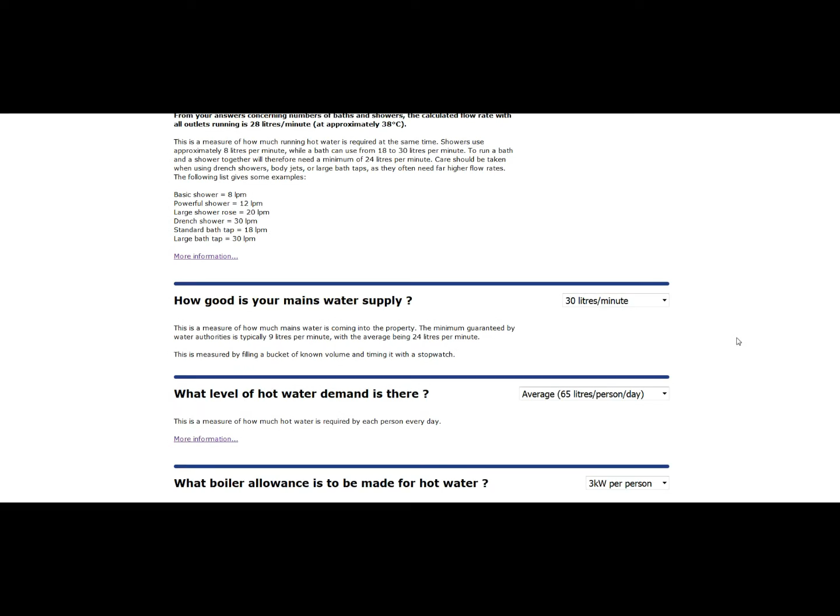How good is our mains water supply? Well, this is to draw your attention to a question that often gets overlooked. I'm going to set that to 30. I'm going to say for now I've got a mains water supply that's good enough for what I'm asking. What level of demand is there? Well, average 65 litres of water per day. 3 kilowatts per person is fairly typical for a hot water allowance.

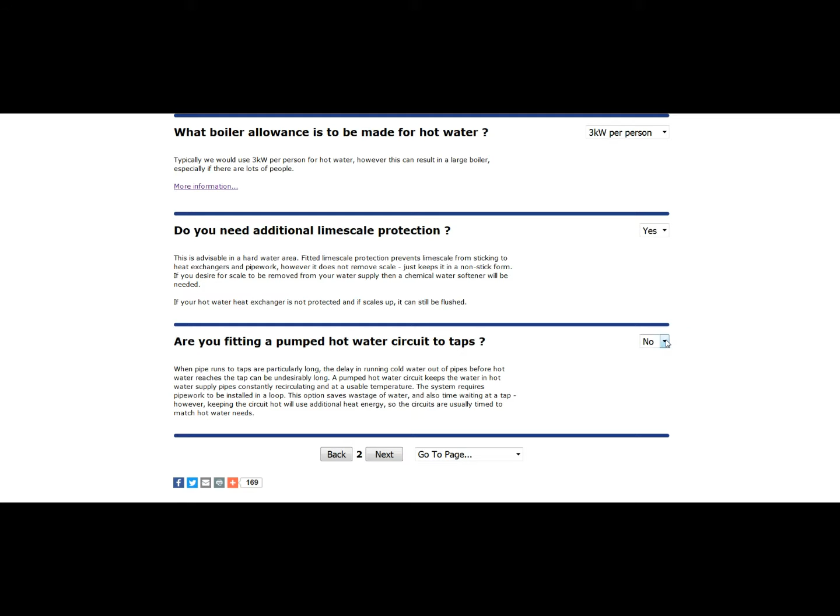Do you need additional limescale protection? Well, yes, we're in a hard water area. And do we want to fit a pumped hot water circuit? So that's a secondary return to make sure that the water is hot at the taps. Let's go yes. Next.

Is the system to provide central heating? Yes. Okay, now in order to do any calculations it needs to actually work out a rough heat loss. So it's a few questions here. Area of the ground floor, well, let's say it's 100 square meters. Let's say I got 25 meters of external wall. Well, that's a bit generous. Let's say 12 meters. Room height 2.4 meters. It's 2 stories.

Yes, it's got some insulation. It's not extremely well insulated by any means. Heating degree days. This is a question about where you are in the country, how much heating requirement there is based on geography. So we'll leave it at the standard. Some questions you can't answer. They're in the advanced mode, which we're not covering today. Are we using heat recovery ventilation? No. How many square meters is heated by radiators?

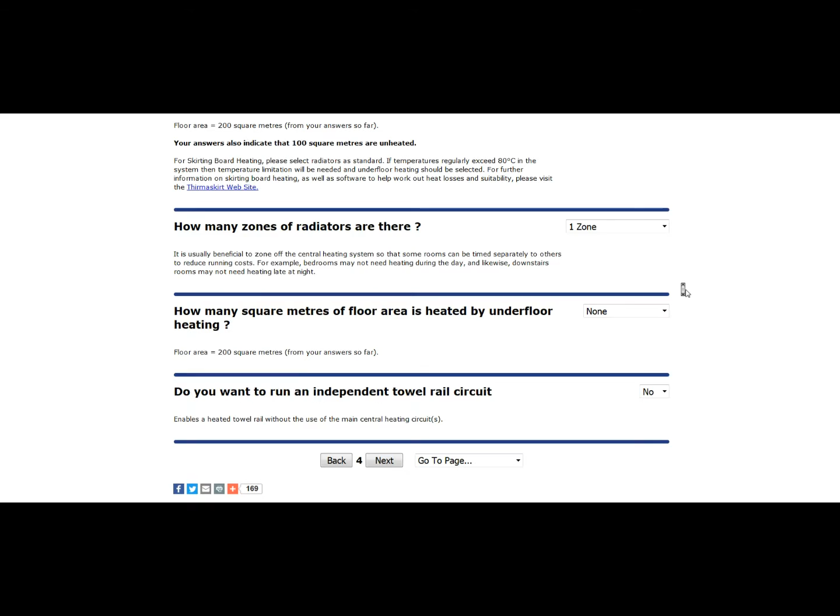Okay, so I've got 200 square meters space to heat. I'm going to go for a split of underfloor heating downstairs and radiators upstairs. So we've got 100 square meters on radiators in one zone, which is upstairs. How many square meters by underfloor? Let's go 100 square meters. As you notice, the questions are resetting each time I answer a question. That's to make sure that the other questions appear as they need to.

How is the underfloor heating controlled? Temperature control is on the manifold, which is fairly typical. And do I want to run an independent towel rail circuit? Let's get that out of the way. Let's see, that is no. Are we going to use a boiler? Yes.

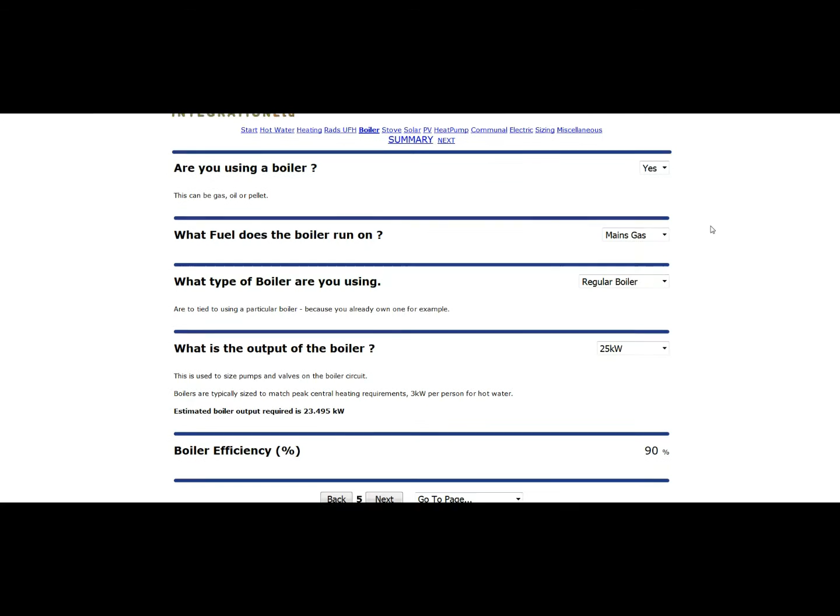Okay, so it's mains gas. It's a regular boiler. We could, if we had a boiler we want to reuse, specify a system or a combination boiler, but given we're on a wood burner system here, we're probably on a vented system, so a regular boiler's fine. What is the output of the boiler? Well, it's done a calculation for us that we need 23.4 kilowatts, and it's picked the next boiler up, so we'll go with that as we haven't got a boiler in hand as yet.

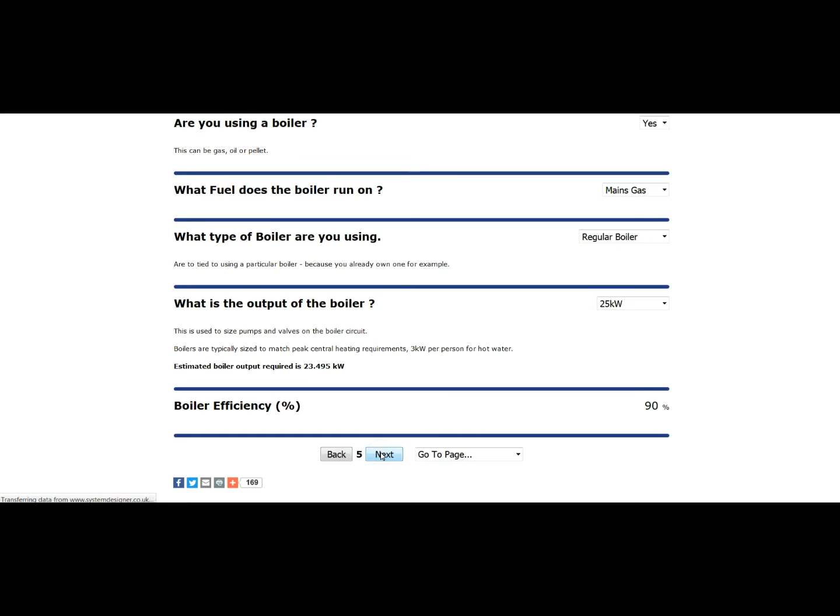Now we're going to go for a wood burner. We're actually going to go for wood burner and solar panels. Now the wood burner needs to be, no, it's not actually directly below it in our house. We're going to say it's below and across, so it's as if it's downstairs and on the other side of the house, so it's probably going to need to be pump assisted. But the system will pick up on this and select the right part of the equipment.

The output of the stove is again to work out whether it will gravitate or not. So we have 10 kilowatts to water, 5 kilowatts to the room. Let's say it's more like 6 kilowatts to the room and 8 kilowatts to water. And it'll be a manually adjusted one. The other option is self-regulating.

Fuel cost does do a calculation of running costs. That's where that figure is required for. Now, how often are we going to use it? On a running costs calculation, we need to know really if you're going to use it once a week or all day long. So there's a question here to get a feel. So let's say we're up to 6 hours a day. We're going to be serious about using the wood burner.

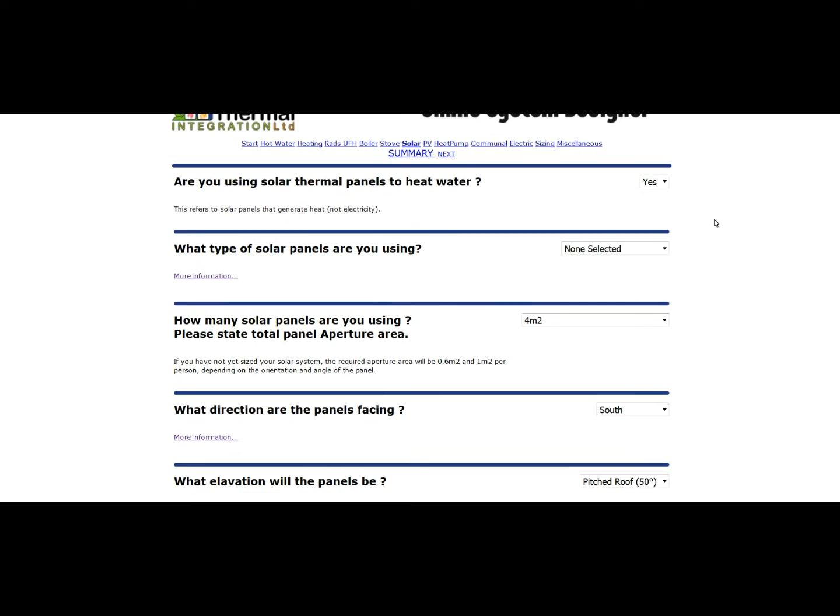Solar panels, yes. We're going to use flat plate. Let's go for 4 square meters. Let's say we're on a south-east facing roof, pitched roof, 50 degrees. Now we're down in this part of the world, so 1100 kilowatt hours per year off the solar is a good starting point. Overshading factor 1, so that means we haven't got trees covering the solar panels.

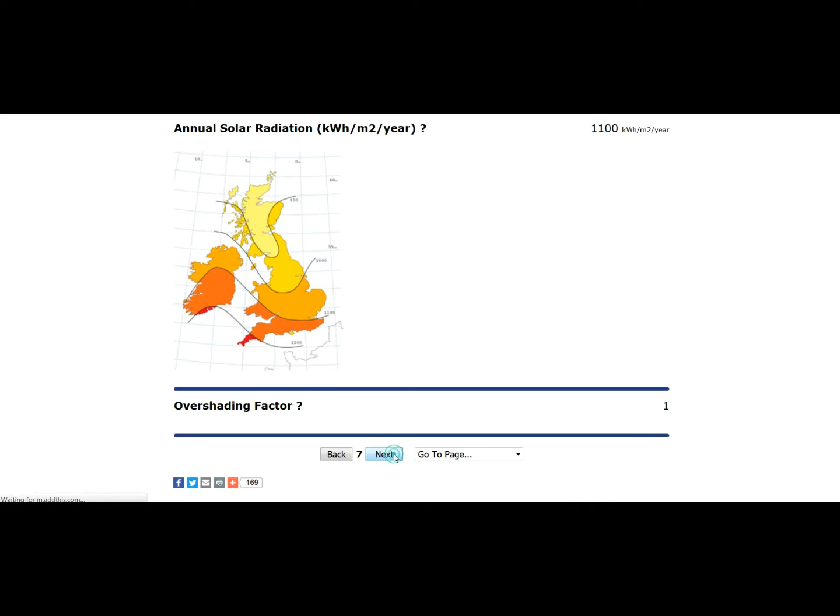Are we going to use PV electric? No. Are we going to use a heat pump? No. Are we going to use a central communal heating system? No. Do we want to run central heating on electric alone? So this is a backup, so if everything else fails, do we want to be capable of running everything electrically? Well, no, we've got solar panels, we've got a wood burner, we've got a boiler. I think we'll have got enough, but we will have a 3 kilowatt electric backup just in case.

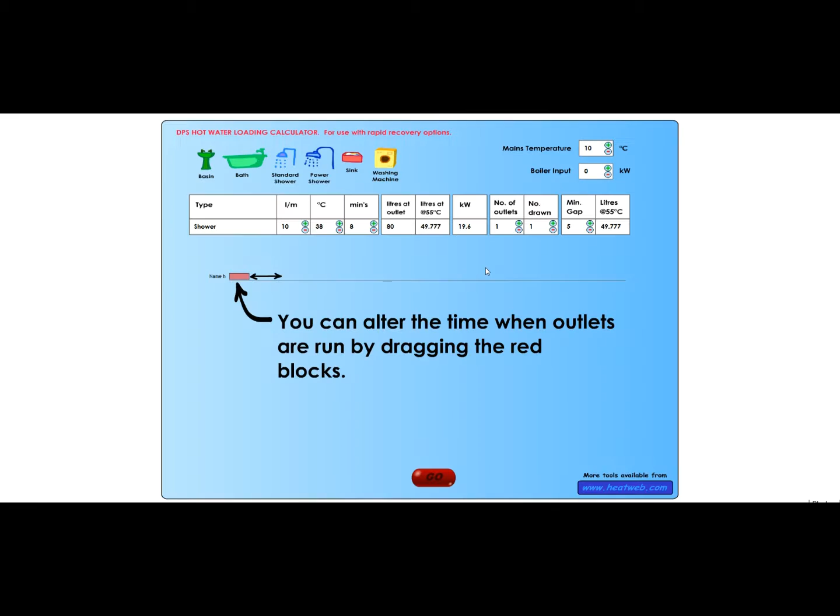Are there any size restrictions? Well, no for now. 300 litres. It doesn't pick the store size, but it does put some calculators there, and it also gives you a recommendation required for the solar. Now this button here, water load calculator, will drop in the 3 people in the house, 2 showers and a bath, 3 draw-offs, 25 kilowatt boiler. I can move the outlets around if I want, to time things specifically.

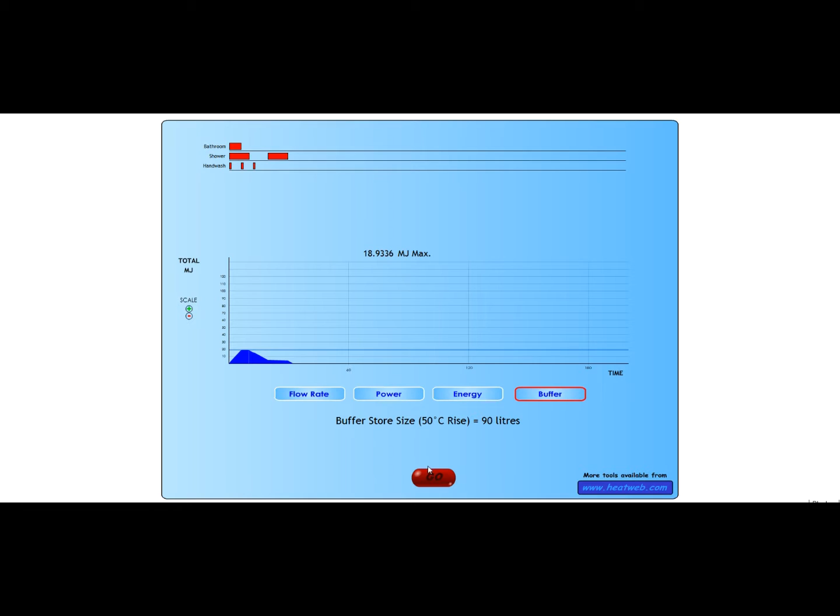So let's say go. Now this is giving us a recommended buffer size of 90 litres for hot water, or a minimum, because we have the boiler to assist us. We could say, well, if we have no boiler input, so if we want to do all off stored heat, put the boiler down to 0, go to 0, and we're on 230 litres. So we're between 90 and 230 litres for domestic hot water.

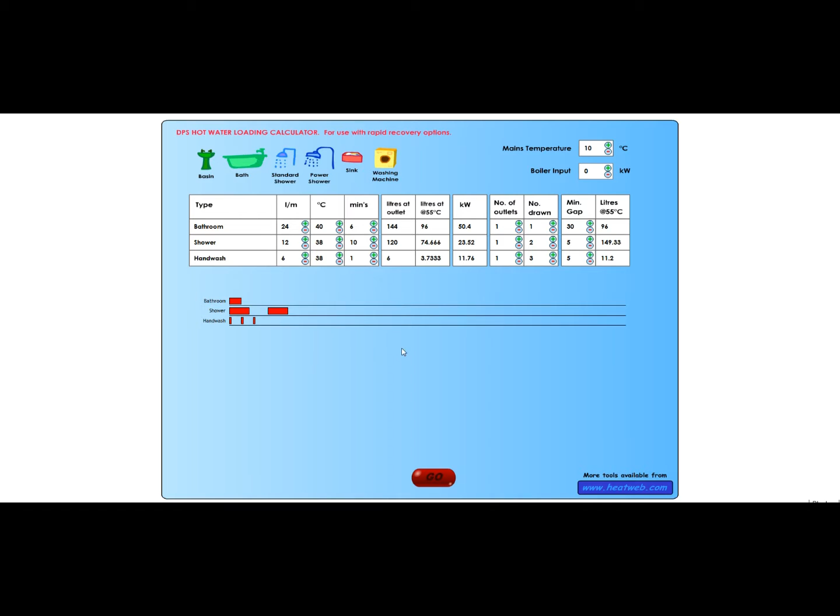Okay, now then there's also a calculator for central heating. So imagine we wanted to run central heating for an hour in the morning off stored heat, before say we get up and reload the wood burner. We don't want the boiler to kick in. Say we're going to run just 1 radiator. So let's put that down to say a 3 kilowatt radiator in the bedroom, just to get the bedrooms warmed up for an hour, just to make it nice enough to get out of bed and chuck some wood on the wood burner.

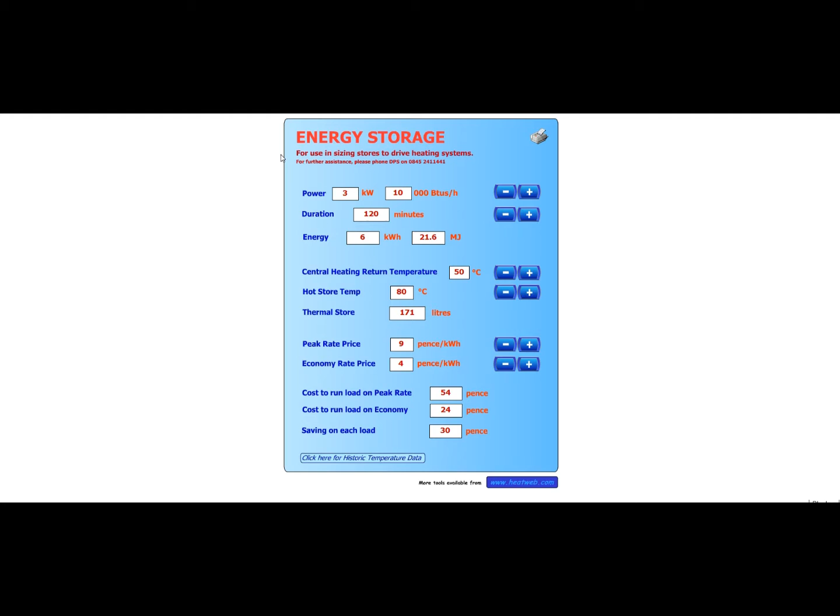Now radiator temperature, the store is at 75 degrees. In fact, the wood burner, so let's put it up to 80, and the central heating return will be about 50 degrees coming back from the radiators at a minimum. Now this tells us we're going to need 85 litres of storage. If I put it for 2 hours, I'll need 170. So it's 170 litres of storage for this radiator in the morning, and I needed between 90 and 230 for hot water. So let's stick with a 300 litre store.

Is it possible to install a feed and expansion tank? Well, yes. Now the system will do full RHI and payback calculations, so it asks you questions such as the payback periods, the various tariffs, labour costs, capital costs. Now we're not going to put numbers in at this stage. We're just going to skip through this section to the summary. So we've answered all the questions now. Now we're going to give it a project name. This is a test.

No need to answer in case anyone in sales picks up my inquiry. Now we have all the questions here in summary format. We can change any one in particular, but we're quite happy with all that.

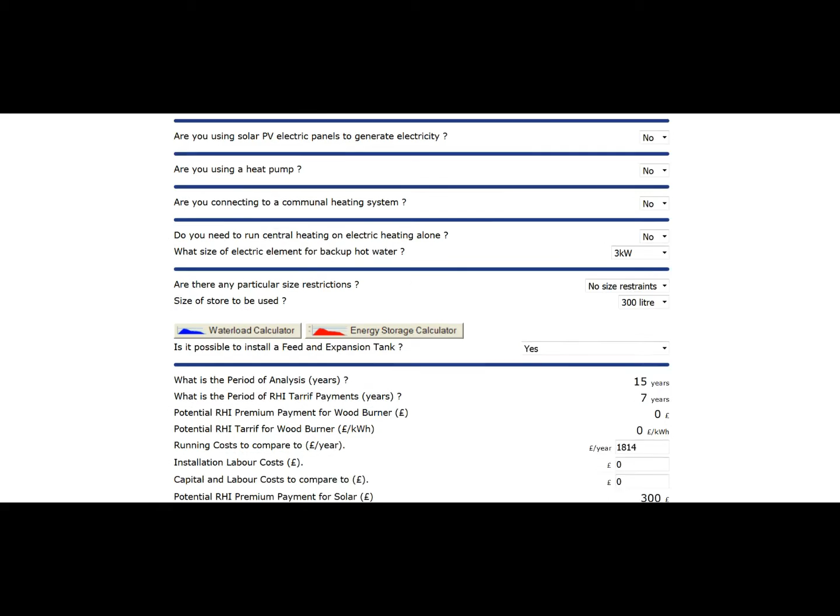Next, now it will ask me for some details. Let's just put in test, what I did earlier, test subject. No, I won't put it under my email. I put it under a new one without a password. So let's call it testingttt@heatweb.com. County Suffolk. Postcode, I shall put it near the factory. We do need to just put the first part of the postcode.

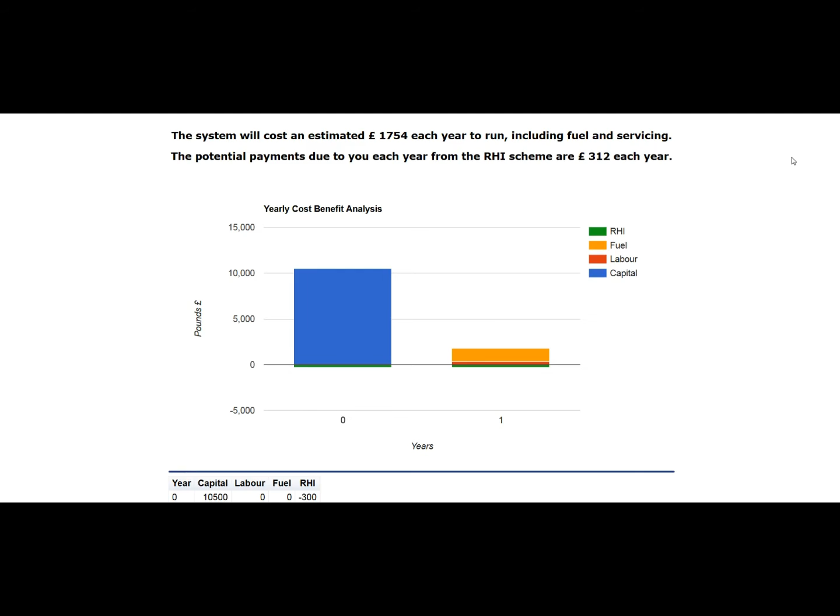Now I won't put a password on this, which does mean it's open to public perusal. There are a few other questions to answer, and if you're an installer, please put some details down there so that we can price accordingly. Okay, now that has sent an email to our main sales agent in that area, and it's also come up with, now we didn't put proper figures in, so ignore the figures, but to give you a feel, it's given us a costing, capital, labour, running costs, and it does payback calculation tables.

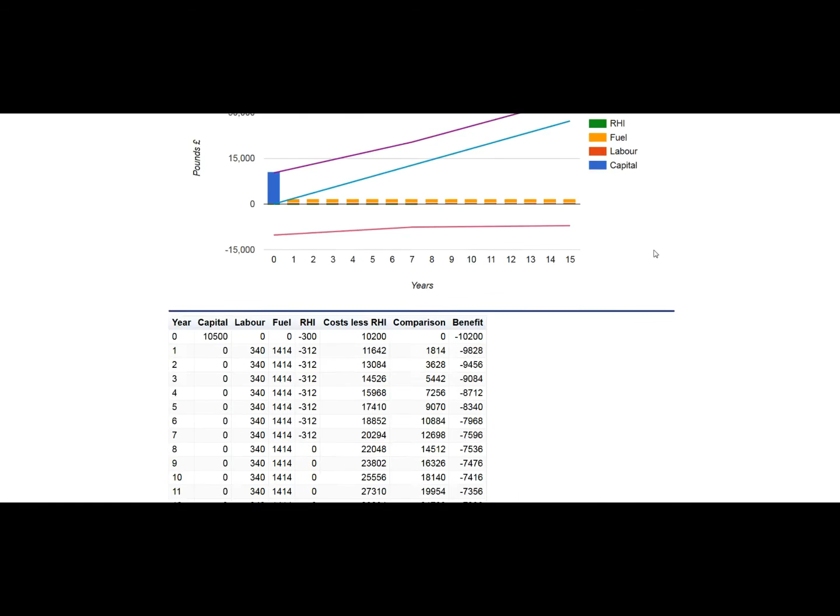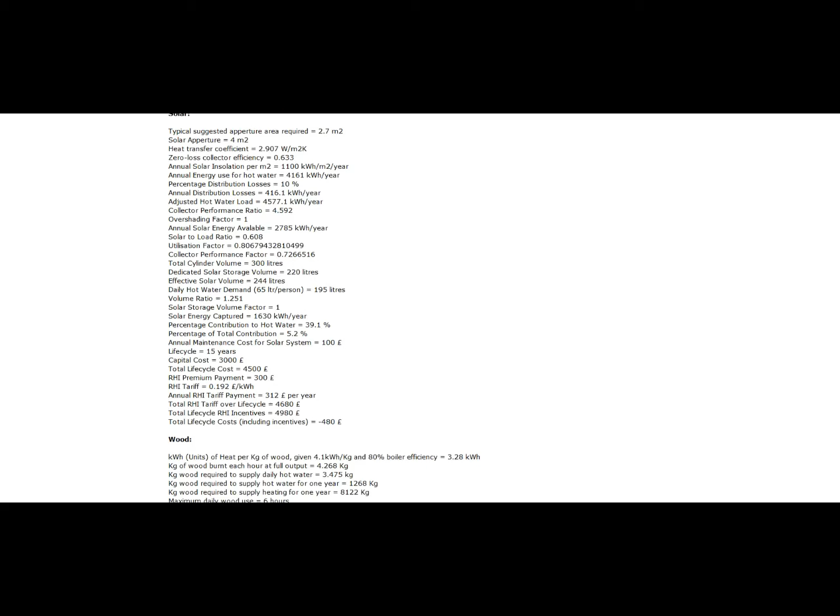Skip past this. The main interesting bit here is the calculations section. So it's all the calculations to do with hot water, the kilowatts, the total energy use per year. It does the same calculation for central heating. So we've got all of our heat inputs as well. These are made up of solar, where we do a full SAP calculation on the solar. We have wood burner calculations, and we have gas boiler calculations.

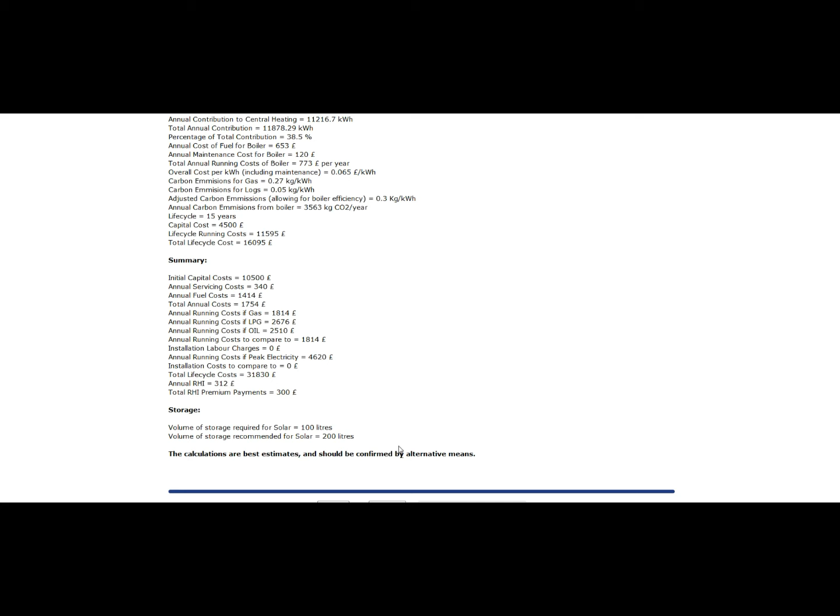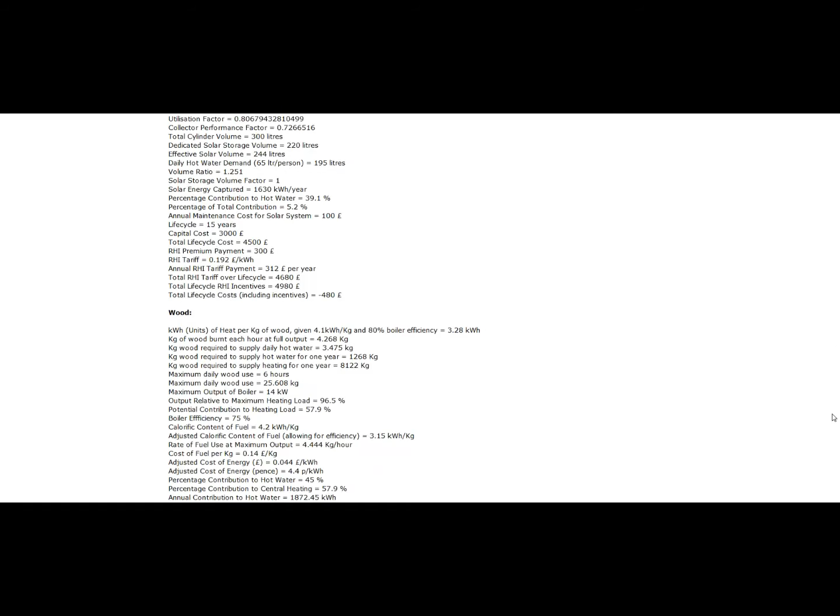So it's a very detailed analysis of all the fuel sources, and then it gives us a summary. So the idea is to do all of the maths that's required to come up with payback calculations, to work out pump sizing, and anything else that we need to know as a designer to make sure that we're selecting the correct product for you. Okay.

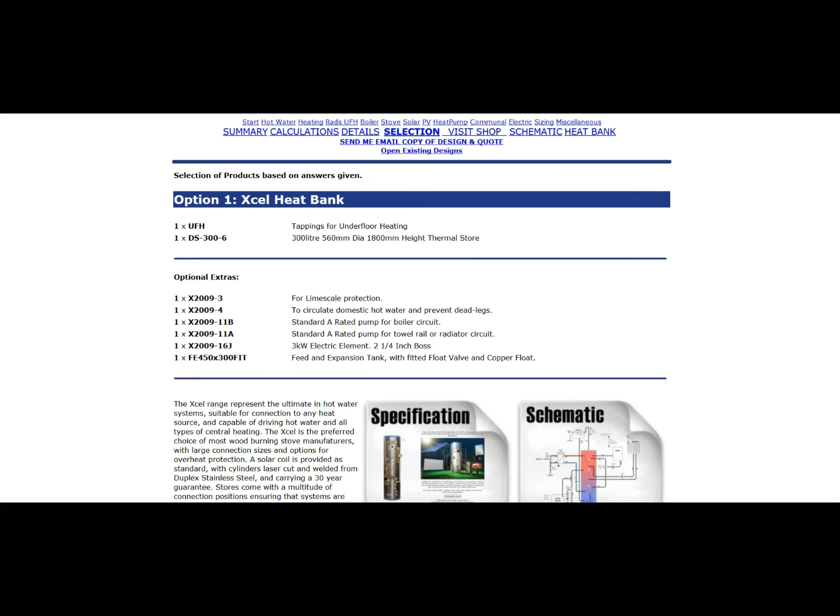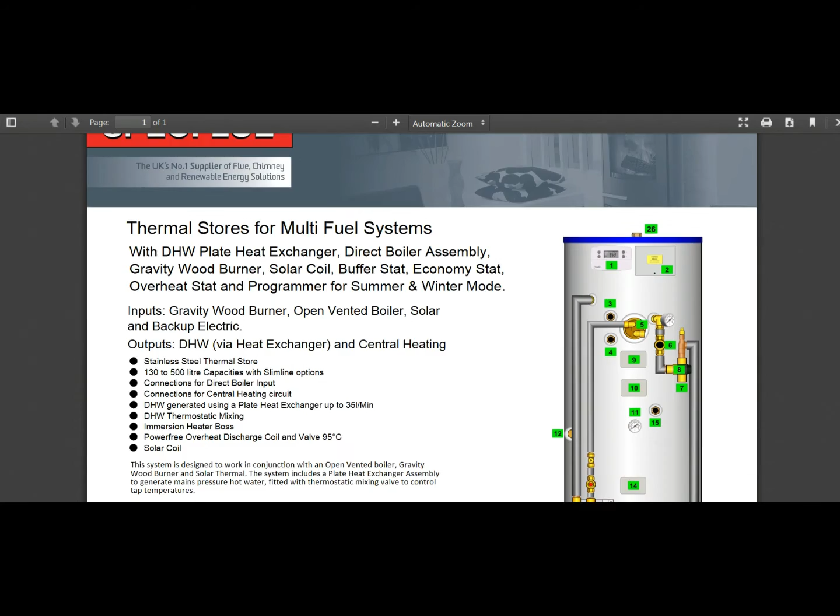Now finally it'll come on to some other pages where it starts selecting actual equipment. It'll pick a standard unit here with extra options such as the tappings for the underfloor heating, lime scale protection, the pumps, backup immersion heaters. So there's the main system and any ancillary equipment that's recommended. It'll give some PDFs. So for example, PDF on the system we're talking about. So this is a system, solar, radiators, solid fuel boiler, F&E tank. Now it hasn't shown the underfloor heating on this schematic because we're adding them as extra bosses to this one.

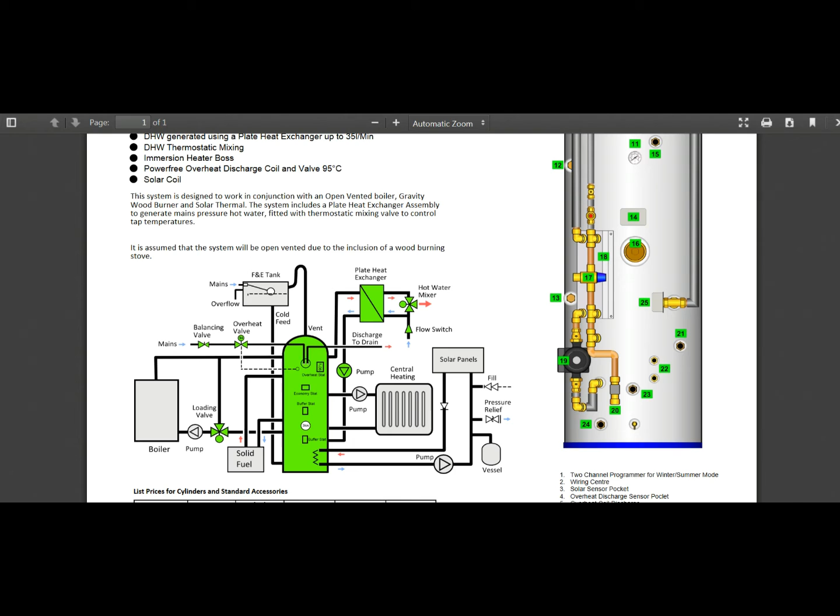So see, it gives you a good detailed list of solar panels, the equipment that's required to fulfill that, and if there was biomass boilers required or anything else, it will also recommend that sort of equipment to us. We do get out of this other pages such as where to visit a local display centre, schematic diagrams, a picture of the system, and an option to email yourself a copy of the quote. So I'll go straight to finish at the moment. Send us an email. Okay, so that's it now. That's us done a system design.